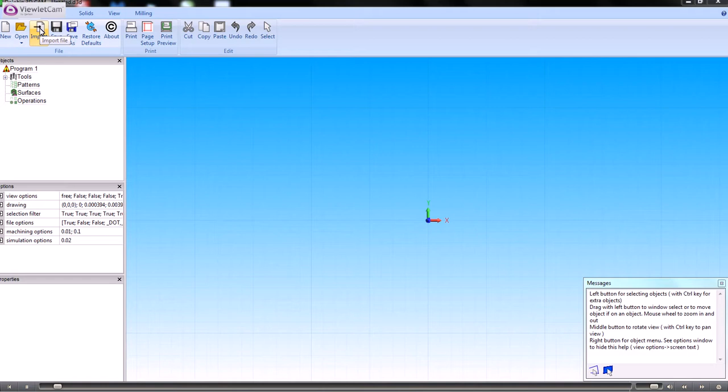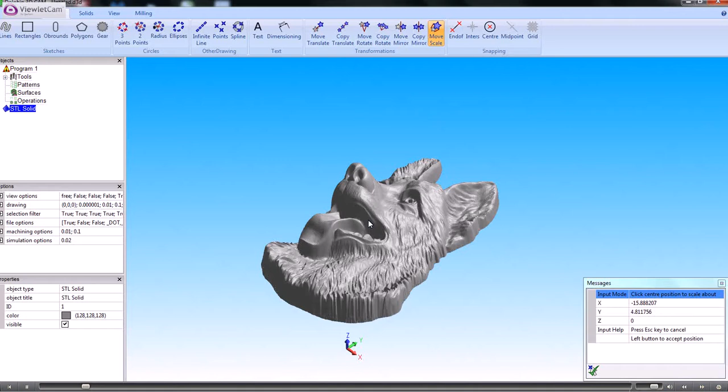I'm in the 3D CAM now, so I'm going to import the STL file. There it is, and I think we probably need to scale this up because it's quite small. I'll just check that my units are in millimeters. You can work in millimeters or inches. So we go into geometry, scale, and we'll make that 10 times bigger. That's probably about right. If you look at that, that's a 6mm tool, so that's probably about the right size. But if you need to make it bigger, you can just scale it up or down as you need to.

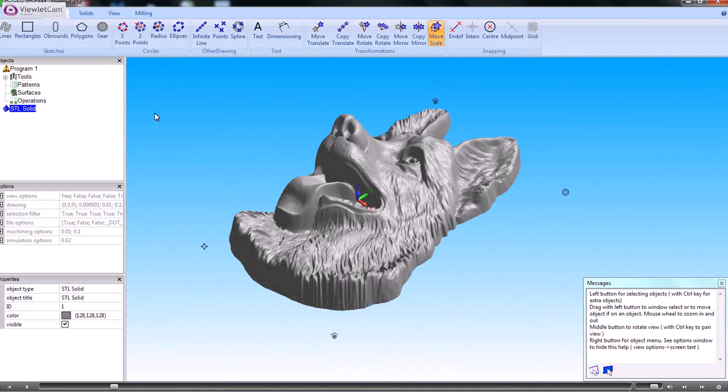We need to create a sketch which will be the boundary for machining. So if we go into geometry, I'll just draw a rectangle around the shape, and that will act as the boundary.

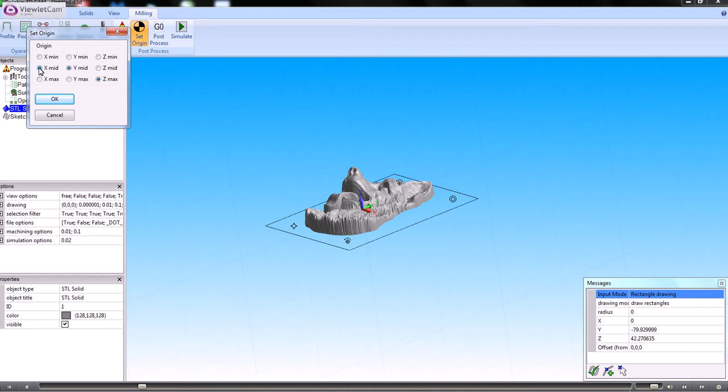Now I'm just going to set my zero, so I go to milling, set origin, and make the datum point the center in X and Y and the maximum in Z. So now I know that Z0 is going to be the top of the job.

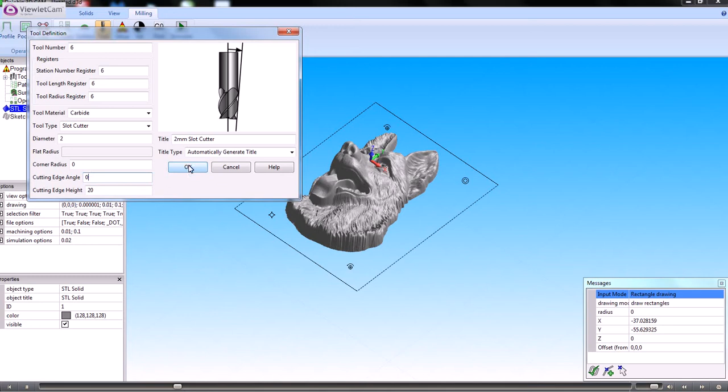We probably need to define quite a small tool for that, so let's have that as a slot cutter. If we want, we can put an angle on this tool, if it's like a V-bit or something. I'll just stick to a small diameter tool, just so it's going to calculate the toolpath.

All I do now is create a surface from that STL file, and I'll check the tolerance. This is the tolerance that will be used to create the surface, so you don't want a very small tolerance here. 0.1 is perfect. That creates the surface which we can then use.

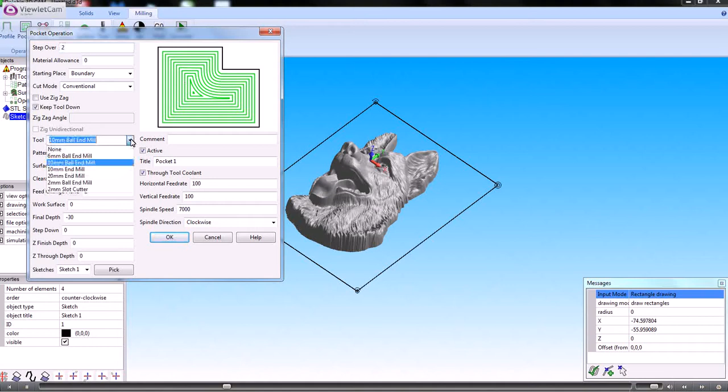So, sketch, right click, make a pocketing operation. I'll set the step over to a large amount to start with, choose the tool I want to use, and the surface I want it to be draped over. Set the depth, and okay, that's going to go away and calculate the toolpath for me.

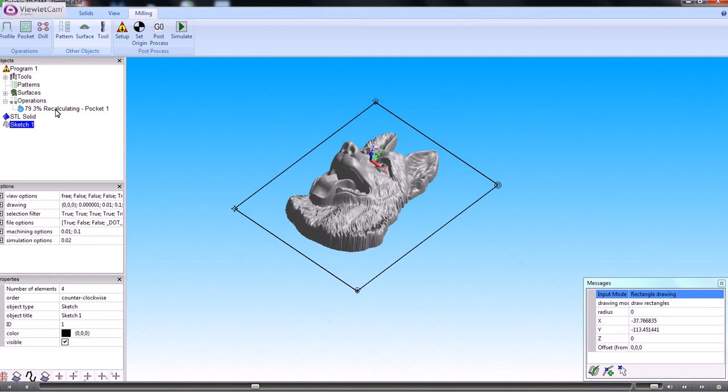You can see that doing that over here. I've set the step over to quite a large amount, so that I can just test and check that that's going to be machined as we want it to be.

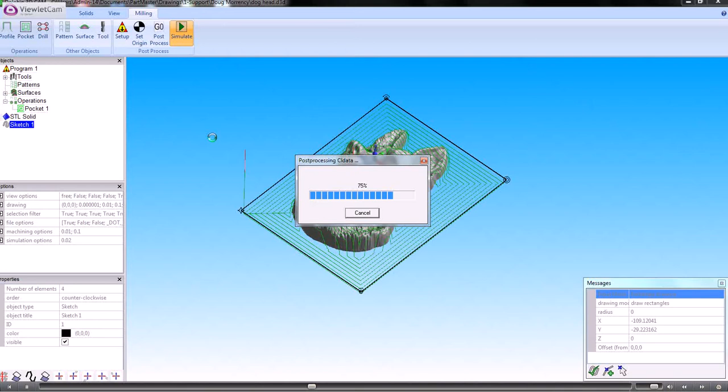Processes the data. This will just give me a quick look to make sure that it's all doing what I expect it to do.

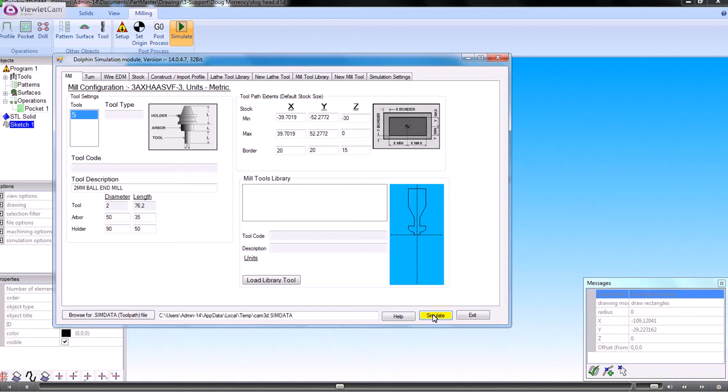This is the simulator. Accept all the defaults and just press simulate. Okay, so that's the stock material.

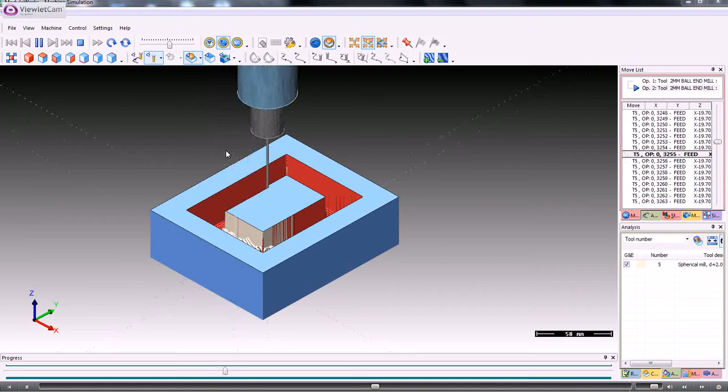We can start machining at the outside, or we can start machining at the center, and this style of pocketing is following the outside sketch, which is the rectangle. We can also have a zigzag toolpath as well.

Okay, let me just replay that. That's just given me a quick rough view to make sure that it's doing what I expect it to do.

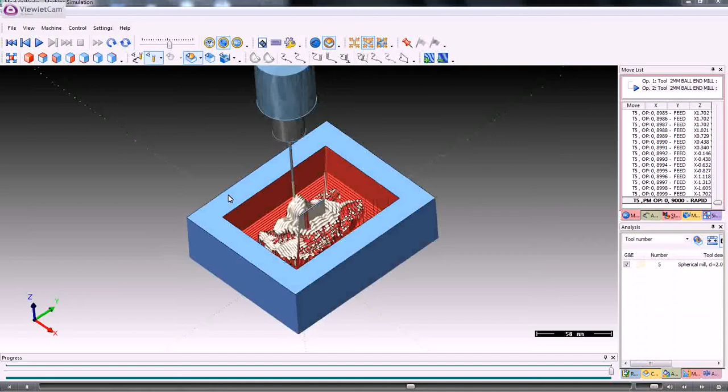If we go back and edit that pocketing operation, a couple of things that we probably need to do: if you can't machine it all down to the same depth, then you'd need to put in a step down, and you would need to reduce the step over here. But when you do that, it will increase the processing time.

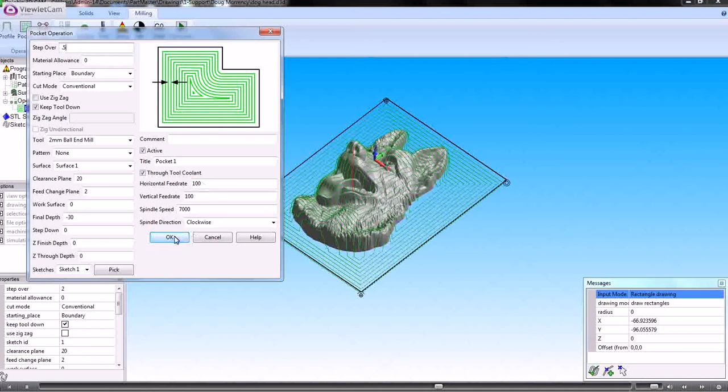So that's now recalculating that surface, and it depends on obviously the speed of your computer. If you've got a nice quick i5 or i7 machine, then it'll do this very quickly. This machine I've got here is quite an old laptop, so it's not fantastically quick.

But when you're dealing with these sorts of shapes that can contain hundreds and thousands of vertices, the more complicated the shape, the longer the processing time. But considering the work that it's doing, it's not taking too long. It just takes less than a minute to do this.

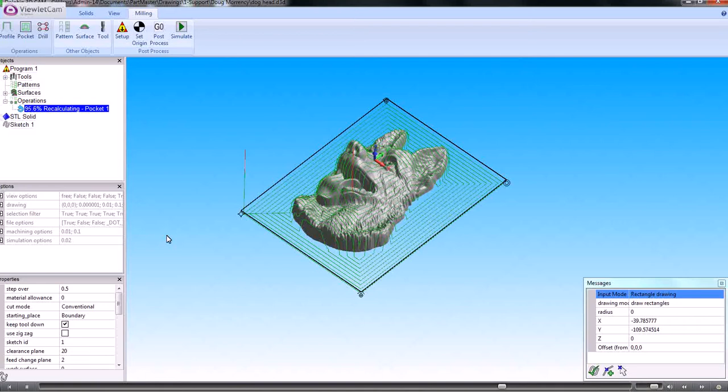Okay, so that's given me a much finer step over now, and now if we simulate that, in effect this is post-processing the cutter location data as though it would be post-processing for your machine tool controller, but rather than producing code for that, it's producing it for the NC simulator.

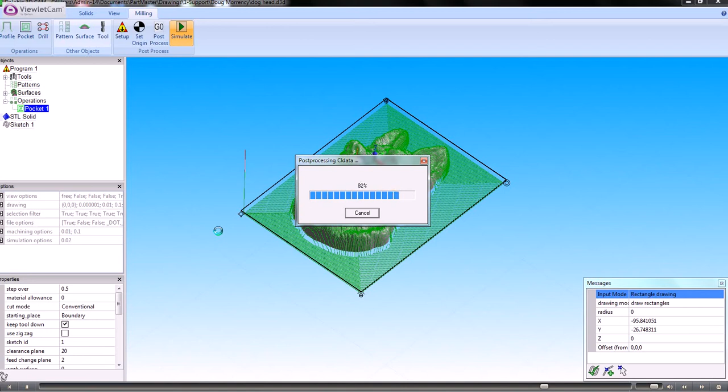So it's actually a good indication of exactly what's actually going to be machined. It is working on the same data that the post-processed data will have.

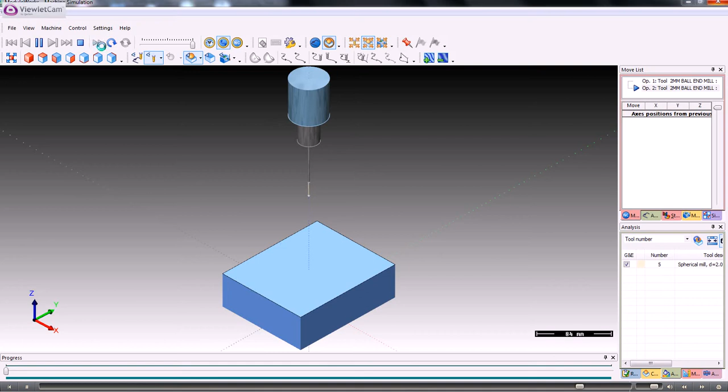Okay, when we come into the simulator, if we don't want to watch the toolpath, then we can go straight to fast forward, and that will fast forward through the simulation without showing the tool on the screen, but it gives us a very quick view of what's going to be cut.

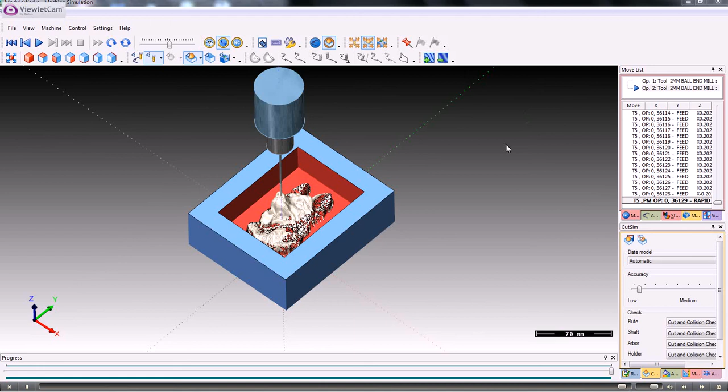When we have any simulation, if the tool lead or the length of the flutes are not deep enough to cut that, it will show it to us in red. So you can easily see that if you're going to be cutting too deep for the particular tool that you've got. Anyway, so that's how we can import the STL file and machine it.